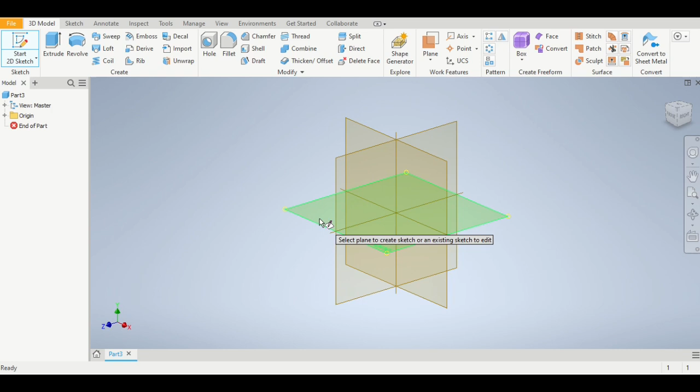So for this project, we're going to navigate to our Dropbox folder and we're going to open up the file called Lego Block 2x2. Now we're going to click on Start 2D Sketch and we're going to pick the flat horizontal work plane. On that work plane, we are going to select the rectangle tool and we are going to go to the origin and sketch a square. We are then going to use the dimension tool and we will dimension that square to be 16mm by 16mm.

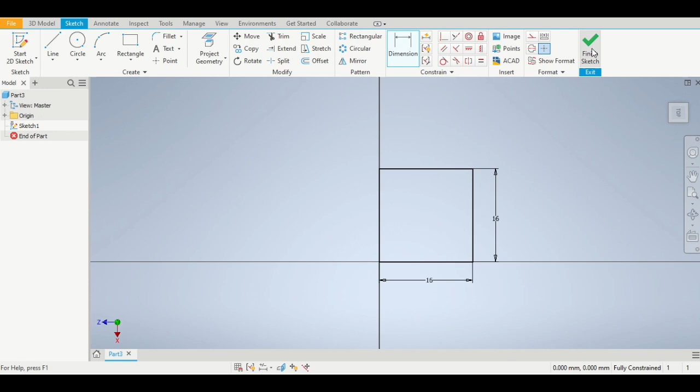Once we have completed that, we need to click the Finish Sketch button and then use the Extrude command to turn our two-dimensional square into a three-dimensional cuboid that is 10mm in height. Now we want to create a new sketch on that top surface, so we click 2D Sketch and we click the top surface, and now we need to draw a circle on this surface and we must dimension the circle to be 5mm in diameter.

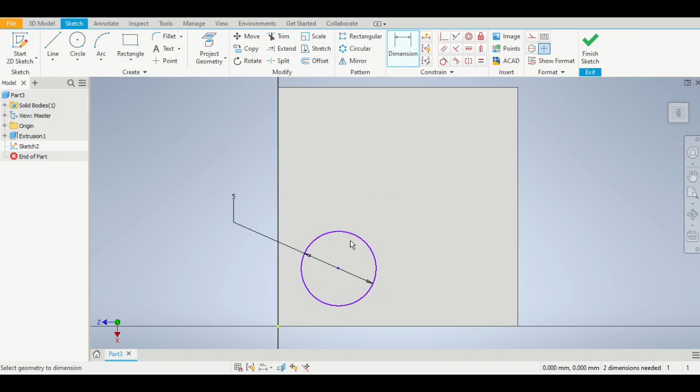Even though we've dimensioned the circle to be 5mm, it's very important that we also dimension the centre point to be a certain distance from the side and the bottom. Now we need to use the dimension tool and then we need to click on the centre point and then click on the left hand edge and make the dimension 4mm and then click on the centre point again and click on the bottom edge and make that dimension also 4mm.

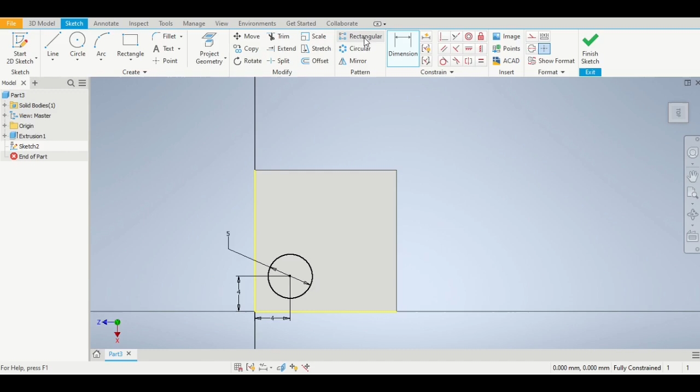Now obviously we need to recreate that circle a further 3 times, but we're not going to redraw it. Instead we're going to use the rectangular pattern tool. So we select the rectangular pattern tool, then we select the circle, and then we tell it which direction we want it to move in. So we select the left hand edge. Notice that it puts the circle down below. We need to use the flip button if that happens so that it moves it up. The dimension in that box there needs to be 8mm.

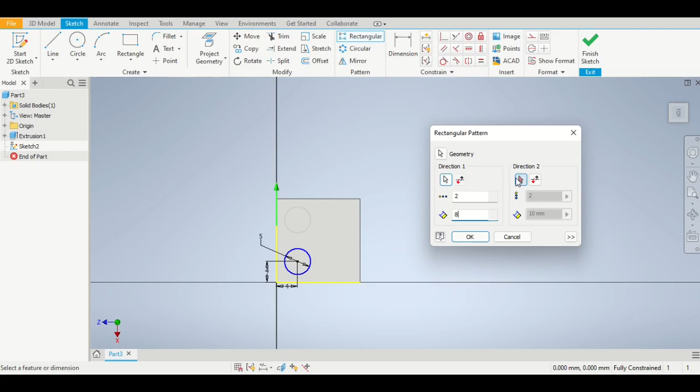Once we've done that, we need to click on direction 2 and we need to click the bottom yellow line. That moves a further 2 circles out to the right hand side, but again we need to dimension this box to be 8mm as well. Once we've done that, click OK and then click Finish Sketch.

We now want to extrude these circles, so we click the Extrude button and then we click on each circle to make it pop up. The standard size for an extrude is 10mm, however that's not the size we need these to be. These need to be 2mm in height. So we edit the dimension and we click OK.

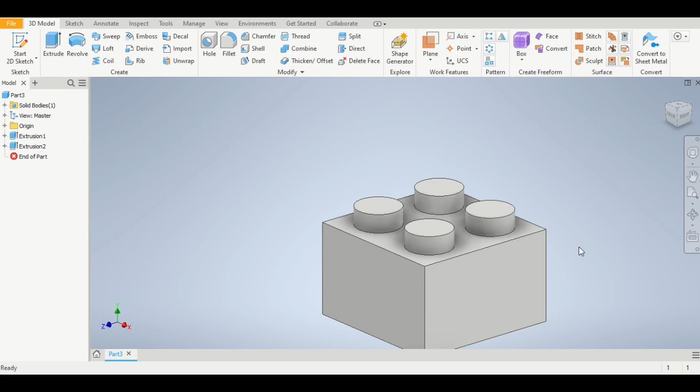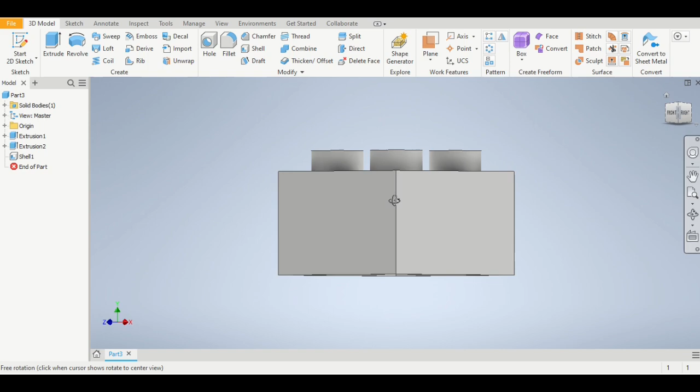Now let's rotate the Lego block so that we can see it from the bottom. That area there, we need to shell that area to make it hollow. So we're going to use the shell command and we're going to click on that bottom face and the size needs to be 1mm. And at that point we just click OK. That has now hollowed out our Lego block exactly how we want it. We can rotate our model to make sure that it looks the way it should from all angles.

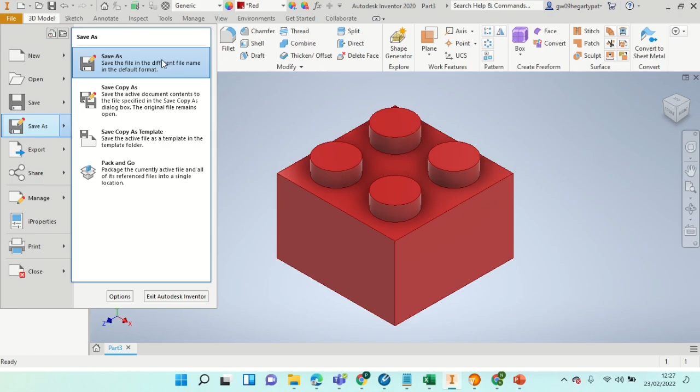All that's left to do now is to select the colour and material selector and go to the drop down and pick a colour of your choice. Thereafter you should navigate to the File Save As menu and make sure you save your file with a file name that includes the colour, such as 2x2 Lego block - red. Thereafter, it's really easy to make duplicates by simply changing the colour to an alternative colour such as green, and then going to the File Save As menu again and renaming it a different name such as 2x2 Lego block green.